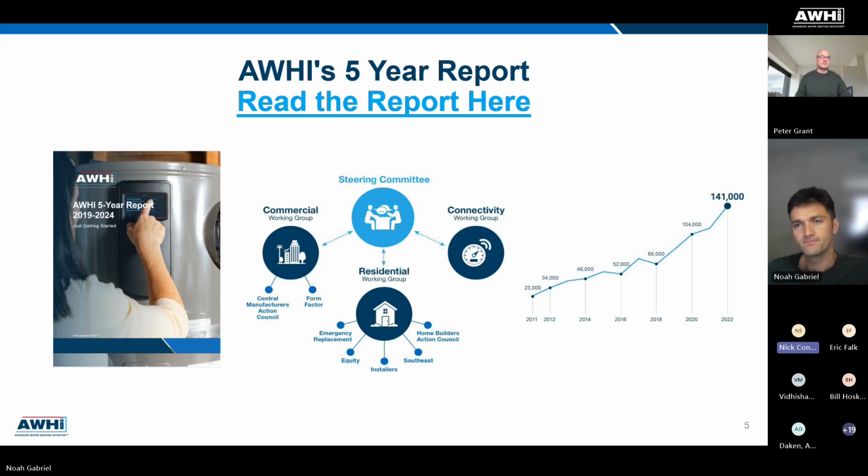There's also the AWHI June newsletter, which I believe you should be getting if you're subscribed to this call, with a bunch of news on what AWHI has been up to in the much more recent past. And then also very exciting is Heat Pump Water Heater Day on October 23rd. It'll be a whole day full of panels and presentations and interactive discussions on where heat pump water heaters are, what the future is, some of the history of heat pump water heaters. So definitely mark your calendars for that. It'll be a lot of exciting presentations, and I think we'll probably have some fun themes and heat pump costumes as always.

And just lastly, in terms of updates, the YouTube channel is up. I think we've talked about this before, but it's a lot easier way to access videos than having to comb through your email to find things. For me, for example, I was looking for a refrigerant video that I had missed, hadn't been able to attend the webinar, and it was super easy to find it on YouTube as opposed to, again, did I get that email or not? So very nicely formatted here. Catch anything you missed in some of the other working groups as well, and check out some of those and see if you want to join. So with that, I'm going to turn it over to Peter.

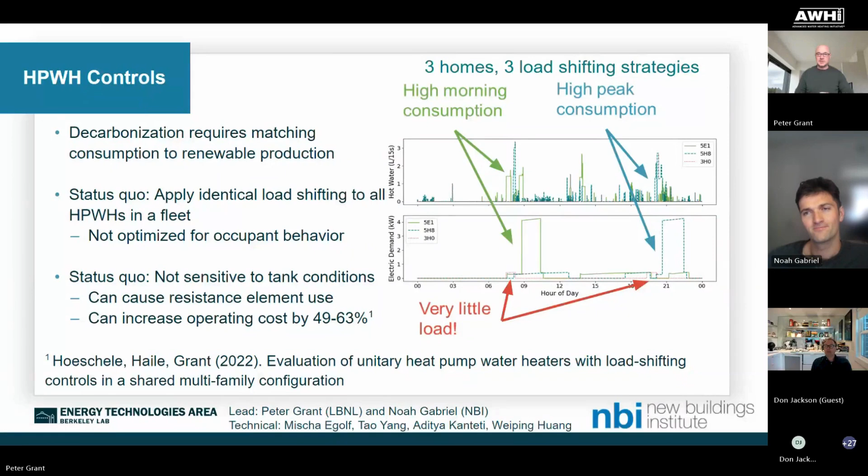And we found that we could optimize the use of existing storage. That's one of our selling points in Stor4Build, where they constantly talk about how we get people to install phase change material. Well, why do that when we have existing storage that's already paid for that we can start with? We found that in this case, we could shift 77% of the load away from high price times of day to low price times of day.

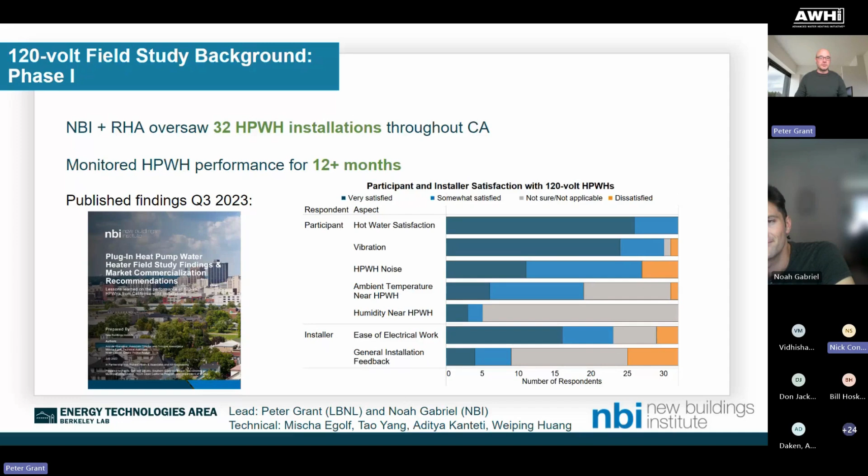They were able to deliver hot water, just as much as people needed, which was the main concern that people were looking out for. So yeah, pretty satisfied with their performance. And NBI has published a report, so you can find that report online and read more if you want to know more about that project.

So with all of that background, we went into a project doing field verification of these controls, having modified them to 120 volt heat pump water heaters. And there were a few important research questions that we wanted to address in this study. One is just about the capabilities of the water heaters, right? We heard that they don't necessarily respond to advanced load up.

We're also aware that sometimes the 120 volt products have a higher set temperature for the tank than what the user specifies. And if that's high enough, even if the product is, from a communications point of view, capable of responding to advanced load up, then the heat pump won't actually be able to raise the temperature anyway because it's already too high. So we wanted to evaluate just how important advanced load up is for the load shifting controls.

Then we wanted to evaluate in the field how well load shifting controls perform with what I'm calling quasi wholesale prices. So those are the prices that we're using in the CalFlexHub research project. From there, we wanted to provide some grounding based on current electricity prices. So we evaluated how well the controls work with current time of use rates from actual utilities.

And then we did a little bit of work evaluating what characteristics of these rate prices really support load shifting and drive good results, and what characteristics maybe aren't the best. And we're also starting to look into how we can transfer this research to utility programs. So that's the efforts underway right now.

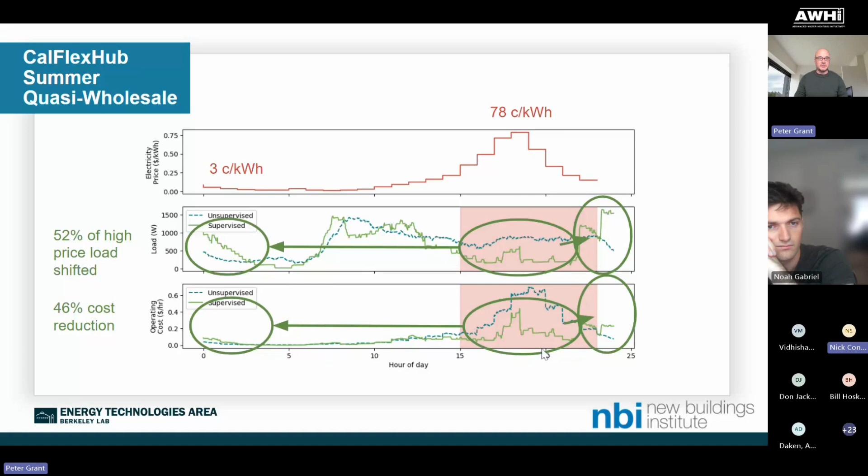Then because we reduced the load so much during the high price period, we also reduced the operating cost significantly, and we showed 46% reduction in operating costs. One other thing that's interesting and worth noting here, I'll go back a little bit to get these circles out of the way.

But you can see right here that there are two different jumps in the electricity consumption. And this is a case of snapback where the water heaters come out of the shed mode and the water in the tank is cold enough to operate the heat pump once they're no longer in shed mode. So the heat pumps start kicking on. And it's a real challenge for the utilities when all of these heat pumps activate at exactly the same time.

But one cool impact of the CalFlexHub prices is since it's stepped and changes every single hour, some heat pumps are kicked on right at one time, and some others kicked on at another time. So we end up with this two-stage snapback, which should be easier for the utilities to manage than if they all happened right at one single time. So that's an example of the CalFlex research.

From there, we moved on to studying the impacts with current utility time of use rates. And we chose 3 different time of use rate structures, really trying to represent not the utilities' prices directly, but different characteristics of different types of price curves, right? So we're not doing a PG&E versus Southern California Edison comparison. We're doing an EV price curve versus time of use price curve comparison. So we chose 3 of them.

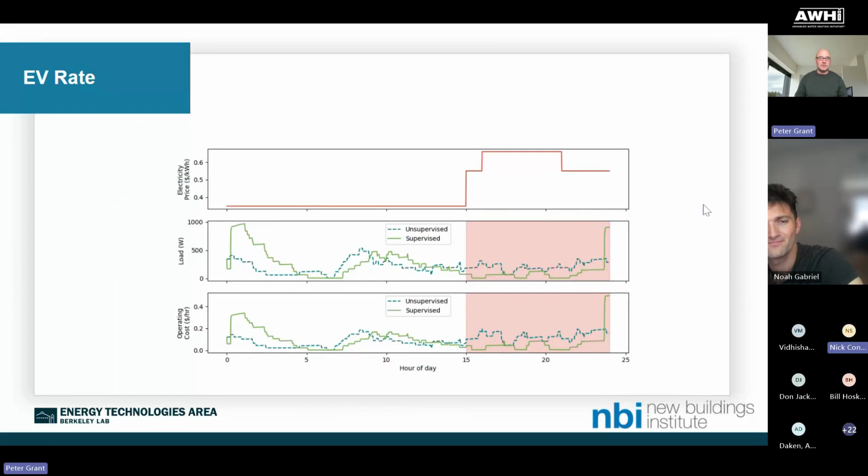And we chose a third one where the price gradually increases throughout the day, because this is pretty common. This is how a lot of the time of use rate schedules in California work these days. And we wanted to capture something fairly typical. So if we look at the EV rate, we can see that we did dramatically reduce the electricity consumption during that high price period, a 54% reduction. And this is because, again, the prices were very, very high. So the controls used the shed command to coast through that peak period as much as possible without consuming electricity.

But we can also see that the typical load during that high price period in these heat pump water heaters was not very high, right? It was averaging about 200 watts, which in a fleet of 4 heat pump water heaters means on average approximately 1/2 of a heat pump is activated, which basically means one heat pump is activated on 1 out of 2 days. You can't actually turn on a half of a heat pump. So the load was pretty low, right?

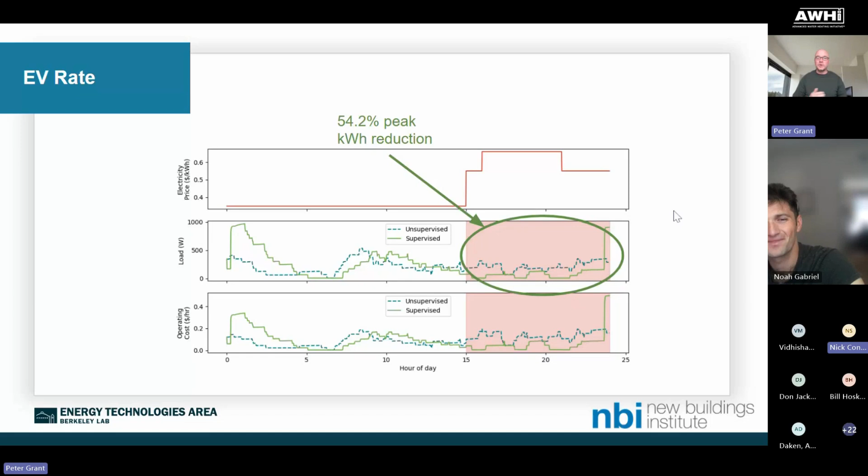While we did reduce the peak load by 54% and shift that load to other times of day, we only got about an 8.5% cost reduction because that peak load was just so small to begin with. We did also notice that we had an error in the controls. It was designed for the more smoothly transitioning CalFlex Hub prices, and we noticed that that led to a design decision which actually caused the heat pumps to come out of shed mode half an hour earlier than they should have. And so we have corrected that now. We also did some post-processing and found that without that error, we would have reduced the bills by about 9.8% instead of 8.5. So a little bit better.

We also saw that there was snapback every single time, right? With all of the water heaters going into shed mode to avoid consuming electricity during the high price period, as soon as they all came out of shed mode, every single heat pump turned on every single day. And so that's a challenge that the utilities would have to face, assuming that price curves have this shape.

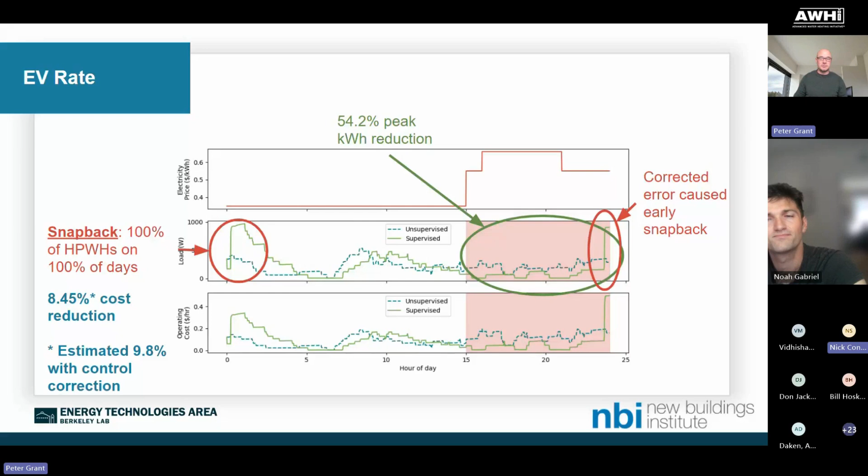We also did one focused on a price curve where the price was reduced during the middle of the day, right? And so we wanted to evaluate how that would impact the load shifting controls. And we do see that the low price prior to the high price caused an increase in consumption during the midday period.

Typically, the fleet averaged about 50 watts right before the high price period, which basically is a way of saying that people took their morning showers, the heat pumps activated to recharge the tank. By the time you got to later in the afternoon, the tanks were charged, the heat pumps were not operating. On roughly 1 out of 10 heat pump days, a heat pump would turn on. So it was pretty rare that they were heating at that time.

But when we started sending the load up command, you can see that it increased to about 500 watts. So we're increasing the typical demand at that time of day by about 10x. And because of that, we're able to pre-charge the tank at these low electricity prices. So that was a good result.

One quirk, though, is that these heat pump water heaters were typically fairly low users, and the controls actually found that the best strategy was to shed for the last hour of the high price period, not for the full high price period. And so in the test case, you can see that the load did start picking up as people consumed hot water and the heat pumps kicked on, and then rapidly shut it down 1 hour before the high price period ended. That's because of this issue in the controls.

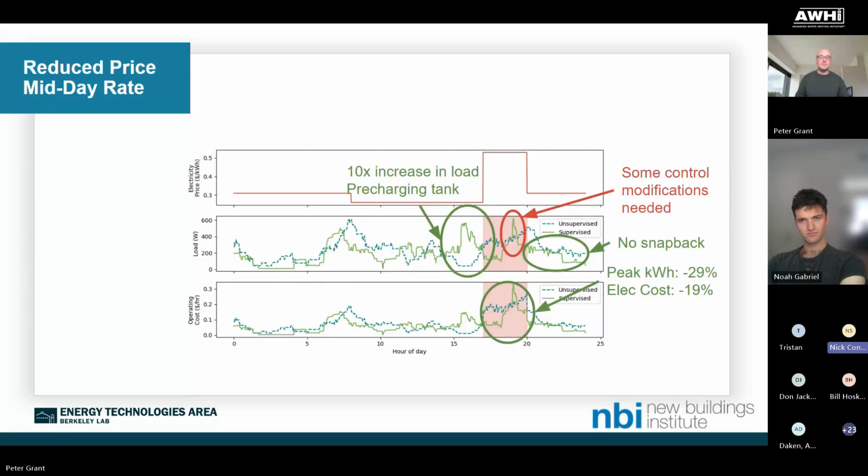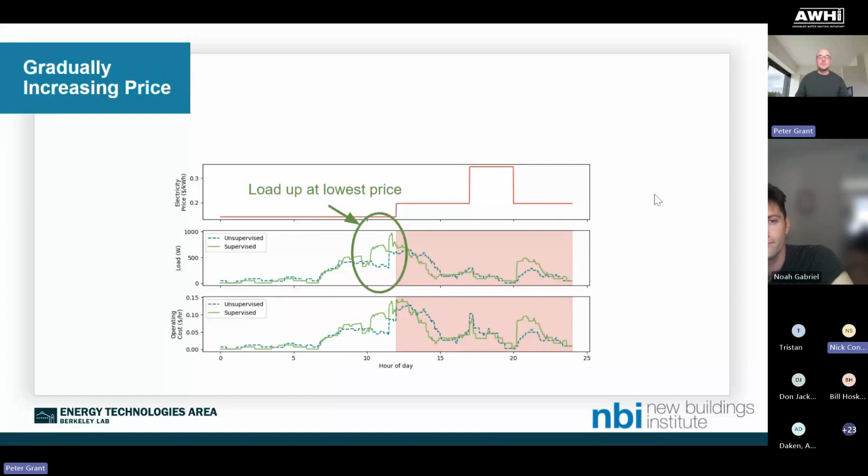So then the last one was one with a gradually increasing price structure. And we would ideally want to see load up both right here, at the end of the lowest price, and right here at the end of the slightly increased price to keep the tank really charged up going into that highest price period. And what we saw was that it did load up at the end of the lowest price. So we had those tanks fairly charged going into the elevated prices.

Then we also tried to load up again right before the prices dramatically increased, but the tanks were too charged, right? They were already charged up from the previous load up, and so we couldn't really add much energy to the tank at that time. Fortunately, as you can see in the plot, these users were fairly low electricity consumers during the highest price period, so that's probably part of why the controls were set up this way. We just didn't necessarily need more modifications to avoid consuming during that high price period.

Then you can also see significant snapback as we came out of the high price period, right? These water heaters were put into shed, and when they came out of shed, several of them were cold enough that they needed to turn on the heat pump. So that's not an ideal result that came out of this price curve.

So if we do a high level comparison, I talked about these four bottom ones here today. We talked about the CalFlexHub winter highly dynamic price at a previous one, so I skipped it today. But we can see that there were some very different results depending on these different price curves.

The CalFlexHub price curves and the EV rate both had the highest prices during the evening peak period. And I don't just mean that in terms of highest price for that price curve, but I also mean in comparison to the other electricity price curves that we studied, which really provided a lot of incentive to shift load away from the peak period. So you can see those three had the largest peak kilowatt hour reductions.

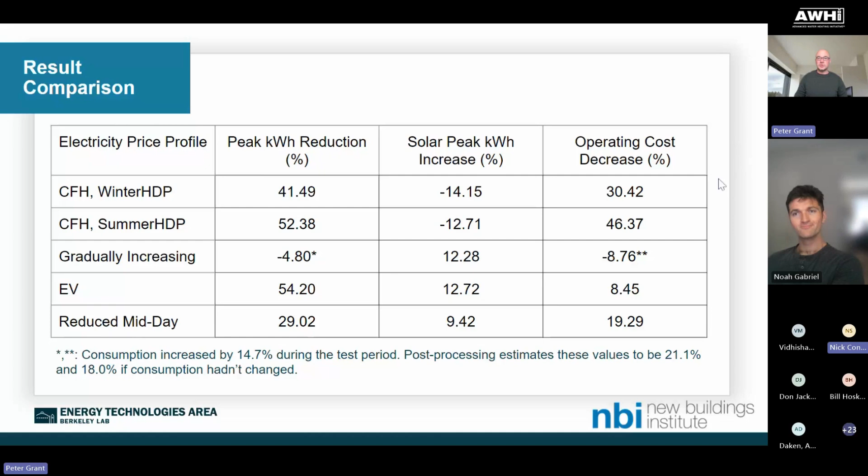So from there, now that we've done these studies and we've developed tools to be able to do this, we're starting to work on creating tools that utility programs can leverage to use these approaches directly in their programs. And this slide so far is content that I've shared here before. This talks about how we create groups of heat pump water heaters. We've simulated 148 water heaters using a model that closely matches one manufacturer's product. So we're confident it's pretty accurate.

And then we group these heat pump water heaters based on similar electricity consumption by calculating the root mean squared error. And root mean squared error is a metric that looks for differences at every single time step, right? So if one heat pump turns on literally 15 seconds later than the other, the metric notices that difference and pushes a larger root mean squared error. So these products are less likely to end up in the same group.

And you can see this leads to some very tightly clustered groups, both in terms of timing for electricity consumption and in terms of identifying which water heaters do use electric resistance elements. I should point out just one quick caveat. The 120 volt products we were studying do not have resistance elements, so that plot on the bottom is clearly for 240 volt heat pump water heaters, but I really wanted to highlight that it can notice those.

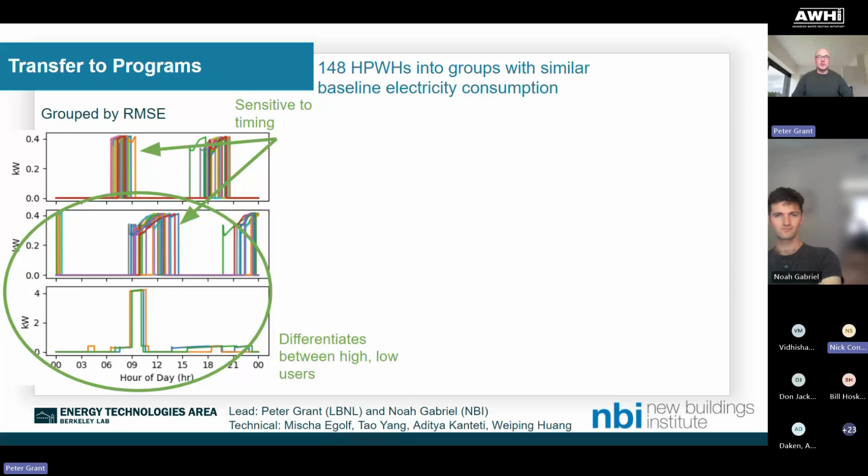Now this creates a lot of groups and it's probably unrealistically closely clustered, and it's not even truly the information the utility programs need, right? They need to know what time of day the water heaters consume electricity relative to the price curves that their occupants or their participants are paying. So we're currently working on updating that algorithm.

And instead of calculating root mean squared error based on every 15-second time step, we're creating a tool that creates periods throughout the day based on the price curve. So you can see an example of that in the bottom right, where we have 4 different periods we're studying. 3 of those periods are defined by the electricity price at that time of day. And then the 4th period is showing what we're calling the morning shower rush.

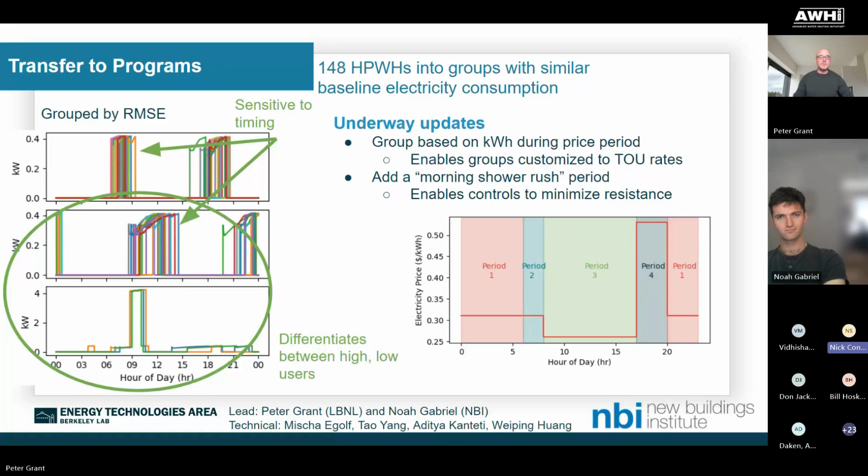So this is when people are going to consume most of their electricity through the water heater responding to them taking showers in the morning. And if they happen to have a 240 volt water heater, this is when they're most likely to activate the electric resistance element. And so we're looking for differences in that control and that behavior, as well as just changes in the timing. And then we're going to create groups based on how the water heaters respond in those different times of day. And so that will create simulated groups of water heaters.

And from there, the utilities will need to know which group a new water heater that they have in the field applies to, so that they can know which customized group of CTA 2045 signal schedules that heat pump water heater should receive. And so the question is, how do they add this new heat pump water heater to a group? So we're suggesting that we can stop thinking of them as heat pump water heaters and start thinking of them as baseline electricity curves. And the CTA 2045 module does enable you to get electricity consumption, so you can create those curves.

And once we have that baseline electric curve, we can put it into each of these different groups, right? Assume it's in the group. And then we can calculate the root mean squared error of that curve compared to the curves in each group. And we can identify the group which returns the lowest root mean squared error, which is a way of saying that the heat pump water heater at this site most closely matches the heat pump water heaters in this particular group. And then the utility program can start sending the CTA 2045 signal schedules for that group out to that heat pump water heater.

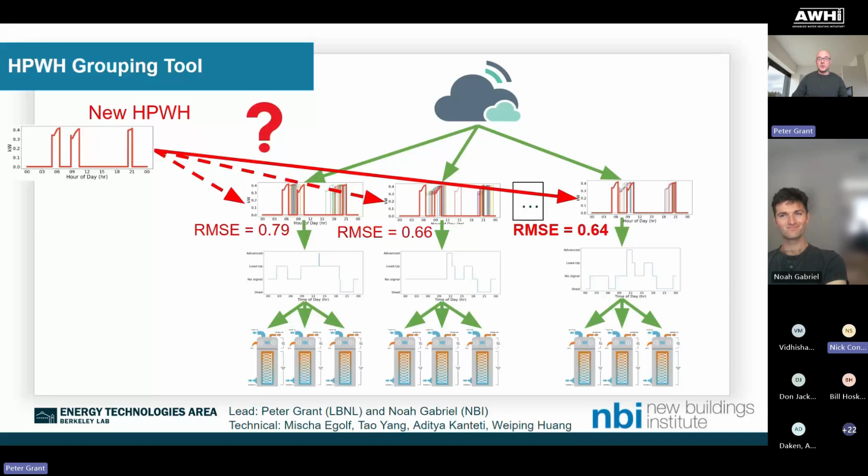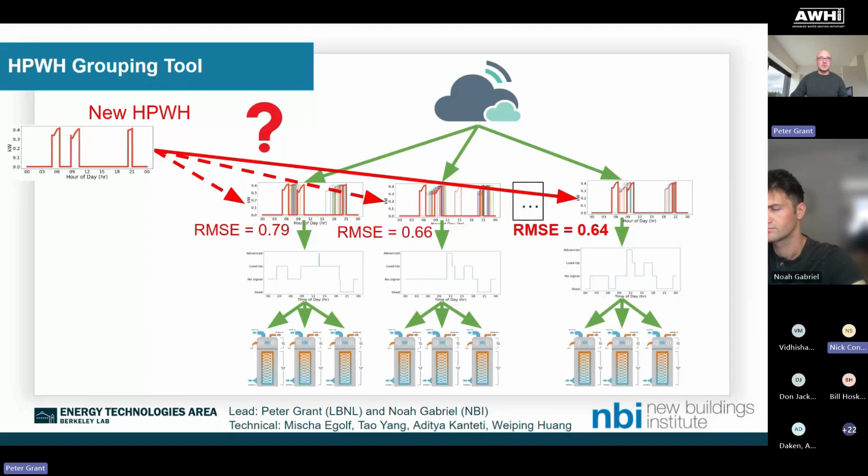So we are in the process of developing these tools, and PG&E's Water Saver program is hoping to start experimenting with using them and just be an alpha tester and see how well they work and how much we need to update them in Q3 of this year. So pretty soon. And that's what I had for you today.

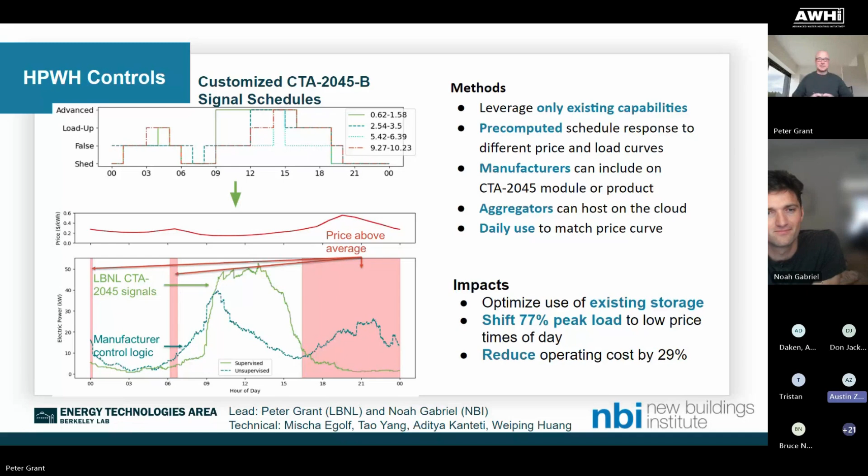I think so. So this is all simulated data. So the slide that I had right here, this is simulated. This is also simulated. Everything from here forward is field monitored. Gotcha. Thank you.

Yeah, great question. And we did get another question in the chat. What were your assumptions for the ambient temp and rate of heat transfer efficiency for this study? I can answer the first part. We didn't have ambient air temp assumptions because we did have detailed monitoring equipment. So we knew what the inlet and outlet temperatures were at all times, and we also knew what the ambient air temperature was, thanks to using thermistors. But I'll let Peter take the heat transfer efficiency.

Yeah, so when developing the control strategies, we were using typical California garage assumptions for ambient temperatures. And so for the heat transfer efficiency, is that referring to the COP of the heat pump? Yeah, I would believe so. Sorry, go ahead. Okay. So we do have a model that's calibrated to closely match one manufacturer's products, and that does include the COP of the heat pump. We've gotten pretty good results, both in terms of the heat transferred to the water and the electricity consumed. So basically we were assuming that we were using that manufacturer's heat pump in the efficiency.

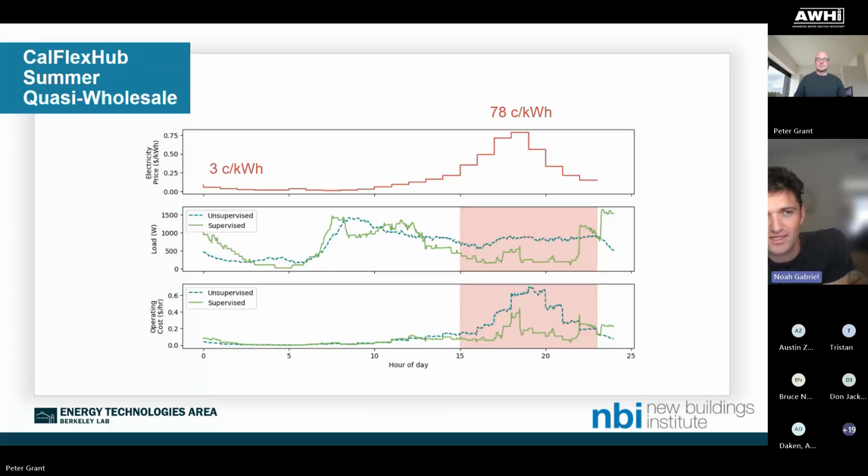Yeah, absolutely. And as Peter was mentioning, these findings are definitely transferable to larger programs. And I think that'll be an awesome next step in the future: how do we go from that 3, 4 water heater fleet to hundreds or thousands of water heaters? So that's definitely where some of our research will be focused next.